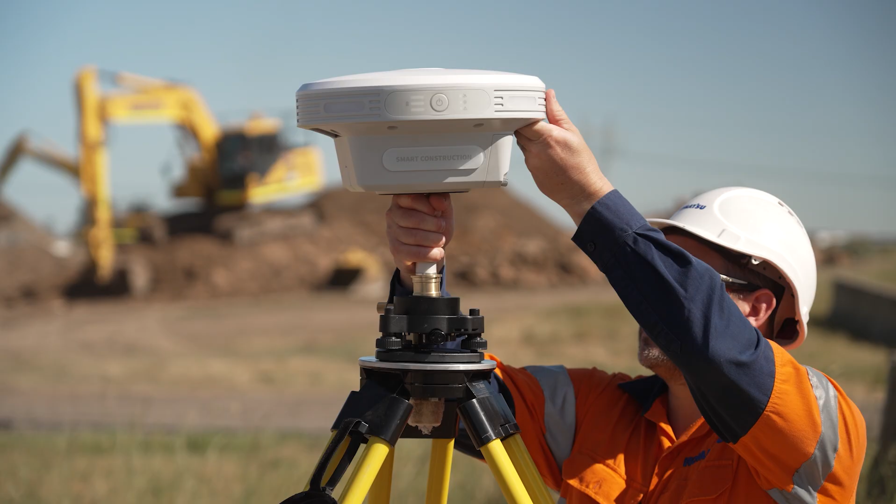G'day, I'm Joshua Smith, Central Region Business Development Manager with Komatsu Australia's Smart Construction team. My role is to help our customers unlock the full potential of Komatsu's technology, including our smart construction products and software. Today, I'll be showing you how our Edge 2 and dashboard solution can process drone flights daily, delivering fast, actionable insights that keep your projects moving efficiently on site.

Drone surveys are typically done for end-of-month surveys by drone pilots or surveyors. Discover how Komatsu helps you cut costs and speed up your workflow. Run your own drone flight and complete the calculations in less than an hour. Improve your visibility, accuracy, and decision-making, among other challenges you come across on civil projects. Don't make decisions on outdated information or relying on third parties.

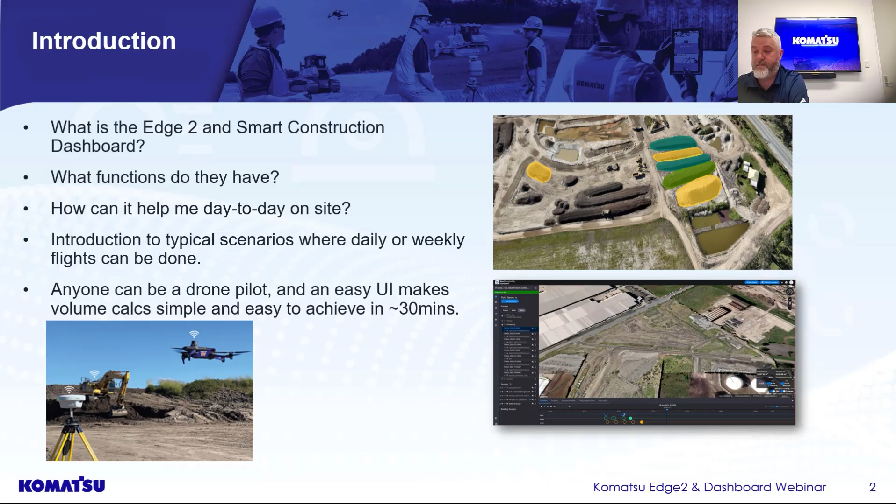Today, we are going to talk about some typical scenarios that you may encounter on site and how easy it is to use the Edge 2 with each of these scenarios. So, what is the Edge 2 and its functions? The Edge 2 captures all the base data required for drone flight calculations, but its real advantage is that it processes the entire flight on board. No sending data to the cloud or a third-party service. As a result, you can have usable data in about 30 minutes for a 1 hectare flight, compared to the 12 to 24 hours typical of other solutions.

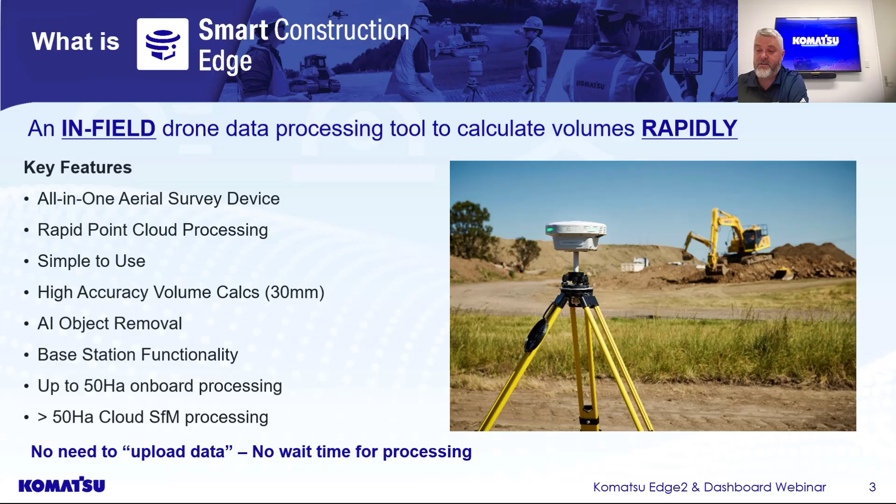Another powerful advantage of the Edge 2 is its ability to function as a GPS base station. If you already have GPS-equipped machinery on site, you can support them directly, eliminating the need for a separate base station or a paid GPS subscription service. So, how easy is it to use and what would be your typical workflow?

First, we set up the Edge, which is straightforward thanks to its self-positioning feature. If it's our first time on a site, we'll create a flight route on the drone controller, a process that usually takes under 5 minutes. Once the route is saved, it can be reused for all future flights. A 1 hectare flight itself also only takes about 5 minutes. As you can see on the screen, the real advantage of the Edge over competing systems is that it removes the need to send data to a third-party processing service. Alright, let's get this drone in the air.

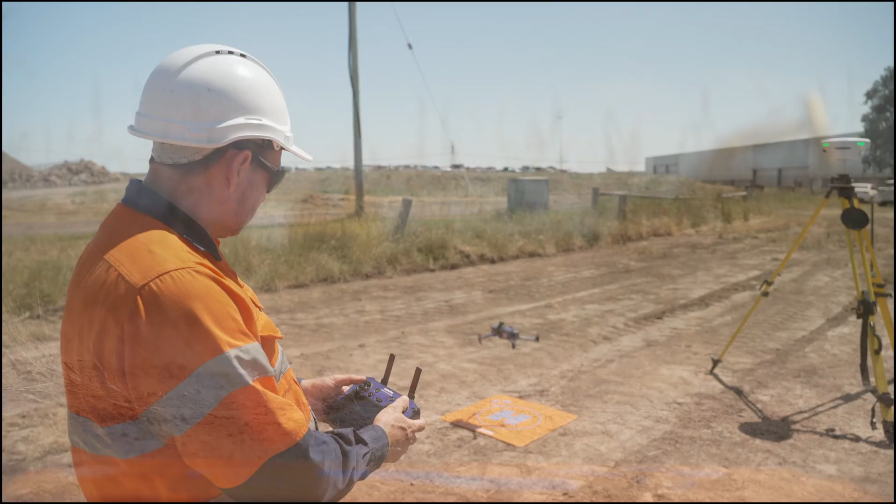Now, our flight is done. This next step is what sets the Edge 2 apart from other solutions on the market. The flight data is then processed locally on board the Edge. No need to send to a third party or cloud-based software, which can sometimes take upwards of 24 hours. What advantages does this give you? Let's have a quick look at our Smart Construction dashboard.

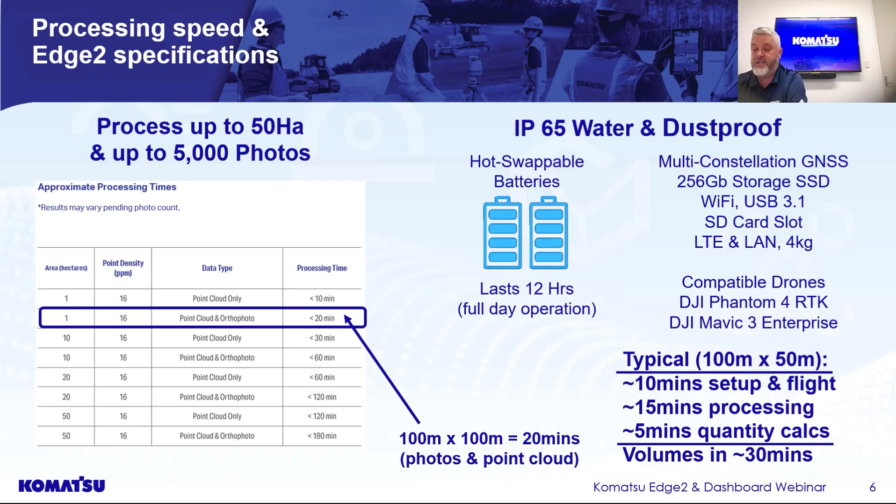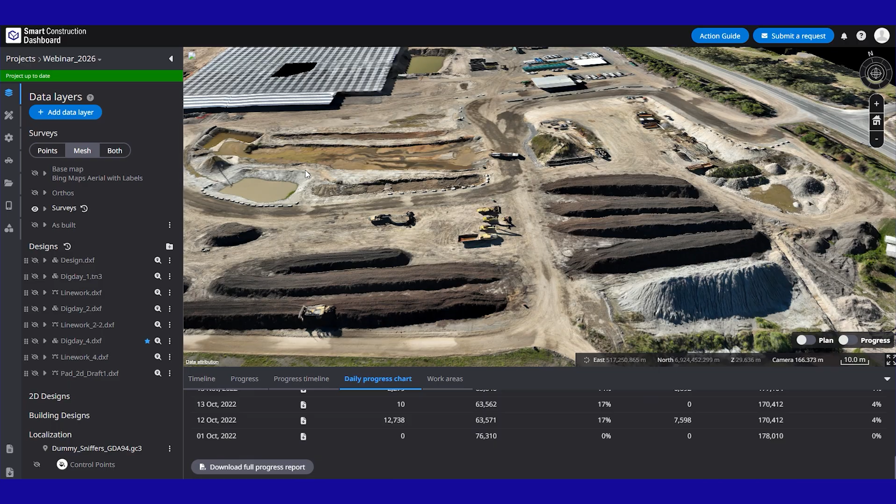The software where we can do all our volumes, material calculations with a simple and easy user interface that anyone can use. Dashboard is a central cloud-based project platform that visualizes surfaces, volumes, and overall progress. It tracks changes over time and makes it easy to share data with any stakeholders. Thanks to its intuitive interface and clear visualizations, even non-technical users can work confidently with what is traditionally a highly technical workflow. Another major advantage is that your dashboard subscription includes unlimited users and unlimited sites.

Here, we can see our drone flight, any supplied design files, machine as-built data, and ortho photos. You can also upload your own pre-processed drone data. Along the bottom of the screen, the system displays site progress, showing how much material has been moved each day or after each drone flight, as well as how much remains to complete the job.

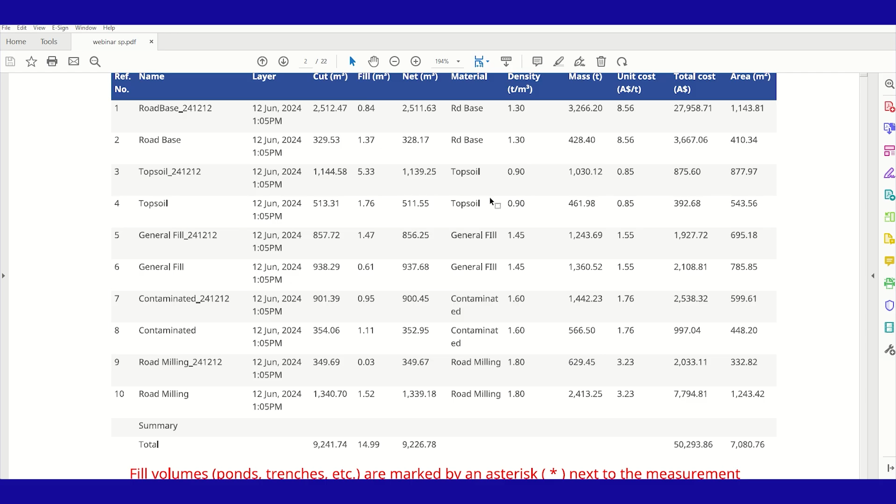In this tab, we have all our measurements. In this example, I've measured several stockpiles and generated a report, each with its own material type, density, and cost. It's ideal for attaching to an invoice or a payment claim. Next, let's look at some typical scenarios you might encounter in your day-to-day site operations.

Usually, you would need to rely on a surveyor, visual estimates, or inaccurate data from load sheets to be able to accurately quantify a stockpile. Edge 2 and Dashboard make it easy with regular drone flights, tracking quantities over time. This ties into real benefits like consistent ordering, better planning, reduced downtime, accurate and consistent reporting.

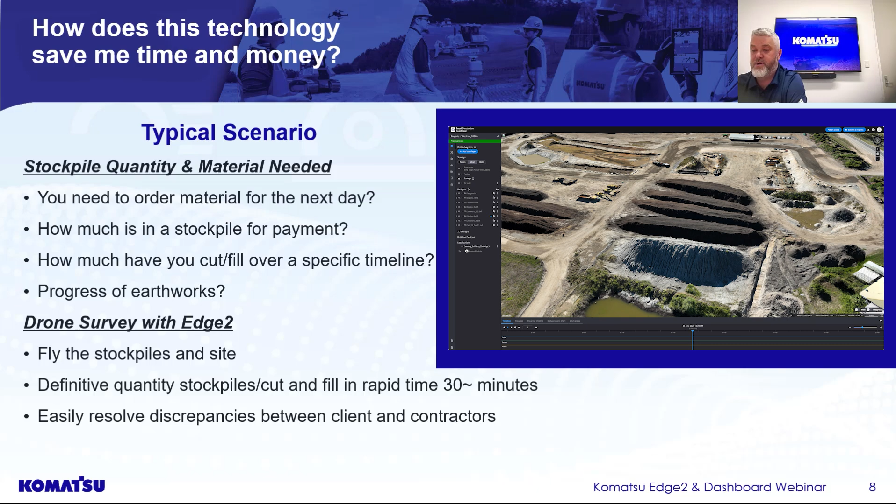Let's look at another common scenario. With data available so quickly, you unlock the ability to fly far more often, receive information more frequently, and dramatically increase efficiency and productivity. The technology automates data collection, aggregation, and processing, turning what used to take hours or days into near real-time insight. You can monitor earthworks progress that's only an hour old, comparing surfaces captured on different dates.

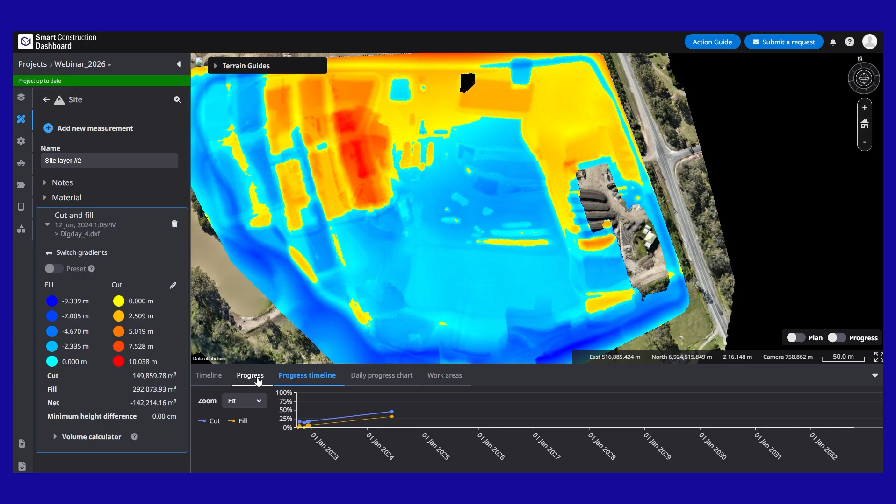You can also compare your design surface to the original ground and then to the actual built surface. This gives teams the ability to track cut and fill, measure productivity, and spot delays early, long before they affect the overall program. It also allows you to validate progress proactively, reducing the risk of commercial disputes.

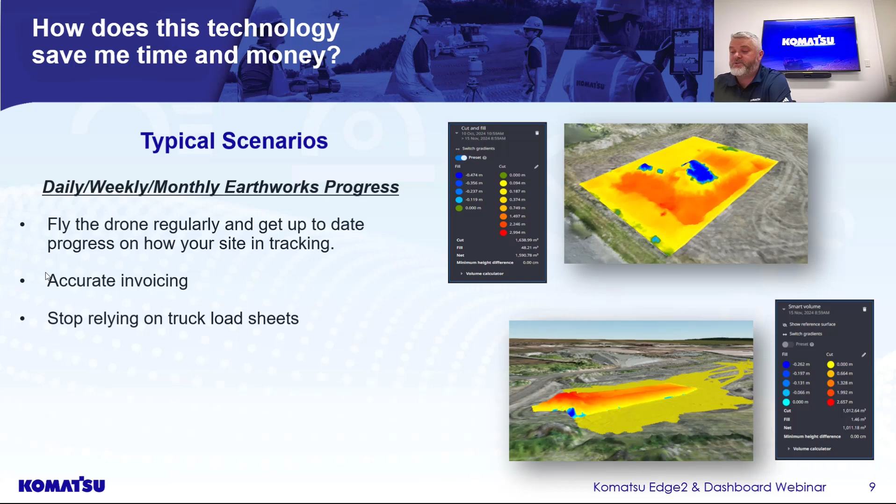Now, let's move on to our third scenario. In this scenario, before construction begins, the Edge 2 can be used to generate highly accurate existing ground models. This gives you a precise snapshot of the pre-construction site and helps uncover any surprises early. These models feed directly into reliable earthworks volume estimates, reducing risk and uncertainty during tendering and quoting.

As construction progresses, the benefits continue. More accurate cut and fill balances, better planning, and tenders that are right the first time with far less reliance on contingency.

Smart Construction Dashboard also serves as a digital site record. Every drone flight generates time-stamped documentation that supports progress claims, variations, and dispute resolution. It strengthens transparency with clients and subcontractors by providing clear visual evidence. This gives both you and your client greater commercial confidence while reducing the potential for any misunderstandings.

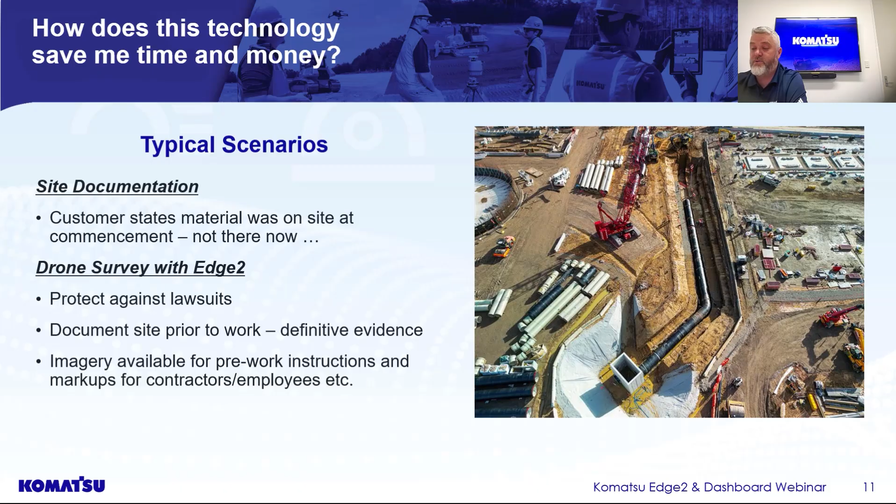Now, let's move on to our final real-world scenario where the Edge 2 and Dashboard can make a meaningful impact. In this example, how much material do I need for tomorrow? With a 30-minute drone flight, including processing, you get an accurate, up-to-date picture of your site. No more guessing. Order with confidence, save time, and reduce your costs.

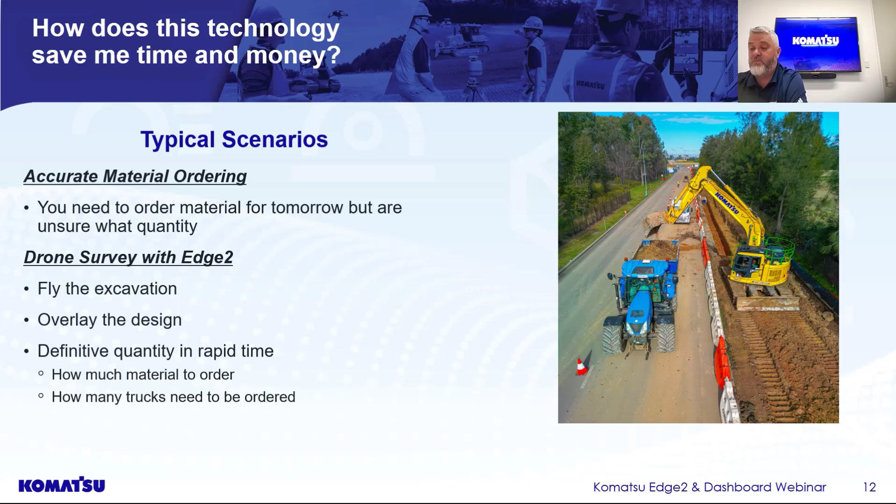This helps you avoid common issues like over-ordering or under-ordering, both of which can lead to delays. Less waste means less rehandling, and better accuracy leads to smoother coordination and stronger relationships with suppliers. Now, let's take a moment to recap what we've covered today and highlight the key benefits.

The key points of Edge 2 and Dashboard are: everyday drone technology delivers the most efficient site survey method, providing same-day data that saves time and money. It delivers detailed site insights for better planning, design optimization, and early identification of challenges. It improves communication and collaboration among stakeholders, reducing any misunderstandings.

Provides accurate aerial measurements to support reliable cost estimation and budgeting. It speeds up site assessments, helping prevent delays and costly reworks. Enhances safety by identifying hazards early and enabling continuous monitoring, keeping workers out of harm's way.

It supports environmental assessment, protecting sensitive areas and promoting sustainable decision making. Overall, the Edge 2 and Dashboard increase efficiency, reduce risk, cut costs and support compliance across construction projects.

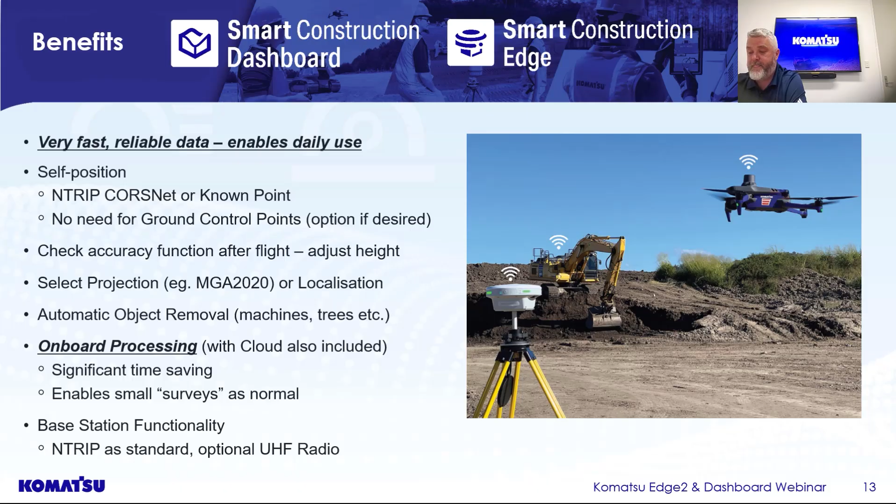So, in conclusion, drone surveys don't need to be limited to end-of-month activities. With the Edge 2 and Dashboard solution, you're not waiting a day or more for processing. You can have results in under 30 minutes and make informed decisions on site as often as you need using your own resources. There's no need to pay high fees when you complete accurate surveys yourself with minimal investment and without extensive survey experience.

Think about it. How much are you currently spending on drone or volume surveys? Do you have reliable documentation before work begins? Are your project quotes based on accurate, up-to-date data? All of this becomes possible with a simple drone and Edge 2 Dashboard setup from Komatsu.